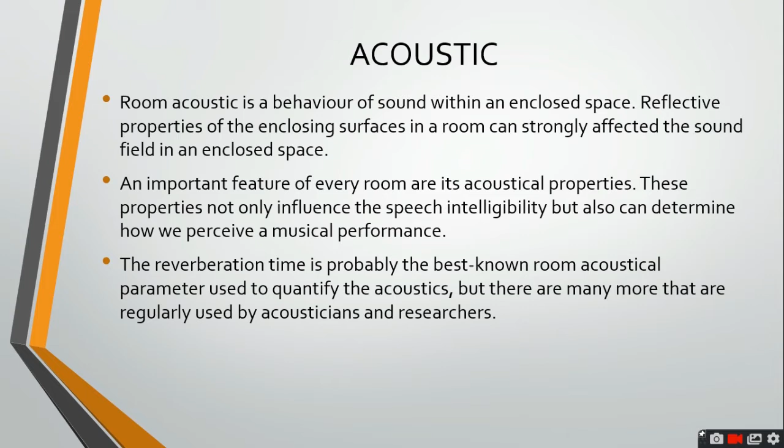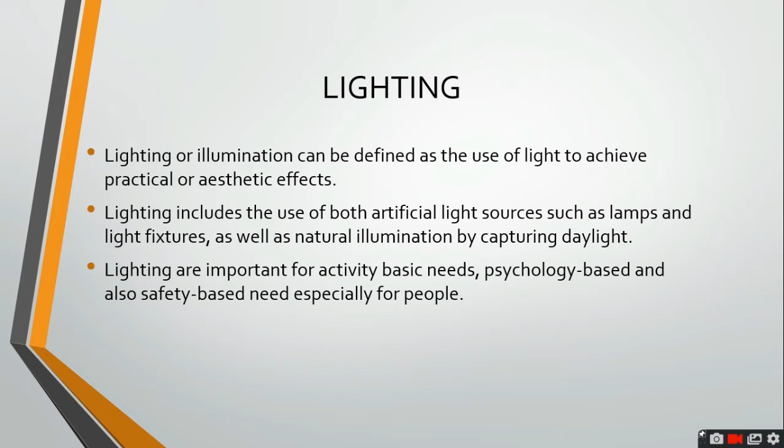Next is lighting. Lighting or illumination can be defined as the use of light to achieve a practical or aesthetic effect. Lighting includes the use of both artificial light sources such as lamps and light fixtures, as well as natural illumination by capturing daylight. Lighting is important for activity basic needs, psychology-based needs, and also safety-based needs, especially for people.

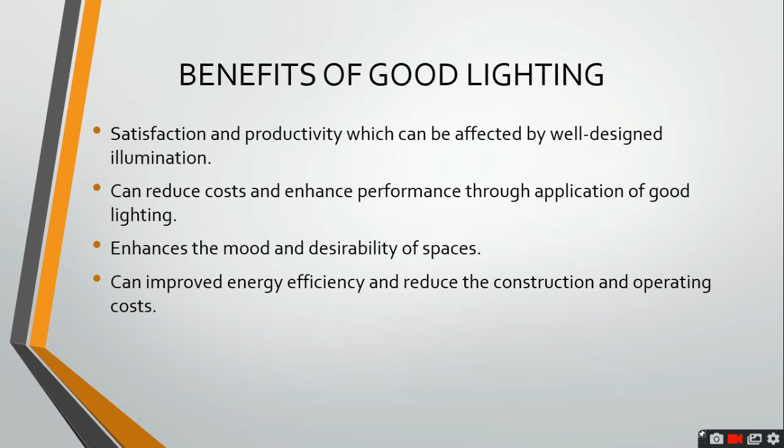So next is the benefits of good lighting. With good lighting, satisfaction and productivity can be affected by well-designed illumination. Next, it can reduce cost and enhance performance through application of good lighting. Good lighting can also enhance the mood and desirability of spaces. Lastly, good lighting can improve energy efficiency and reduce construction and operating costs.

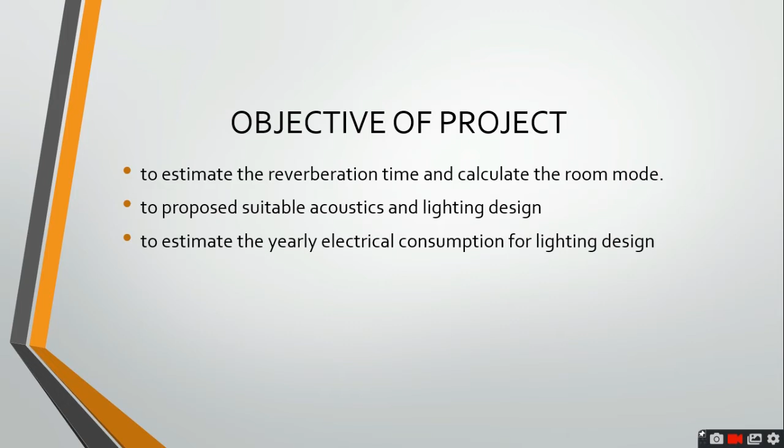So next is our project objectives. Our project is to estimate the reverberation time and calculate the room mode. Next is to propose suitable acoustic and lighting design. Lastly is to estimate the yearly electrical consumption for the lighting design.

Hi, I want to talk about the methodology. Firstly, for acoustic design, there are 6 characteristics: first, liveness; second, intimacy; third, fullness and clarity; fourth, warmth and brilliance; fifth, texture; and lastly, ensemble and blend.

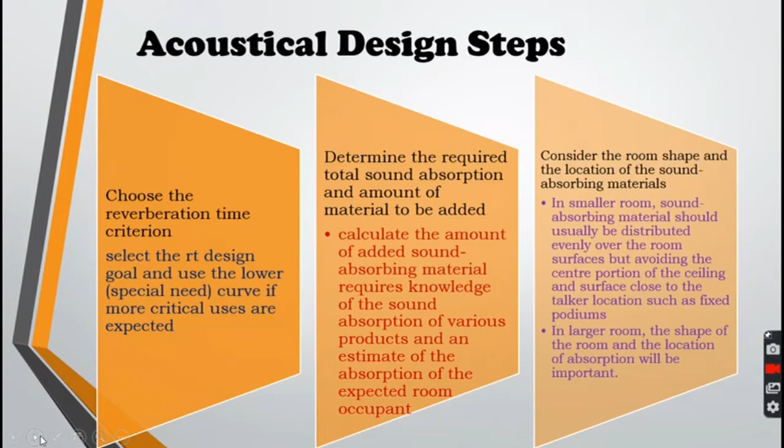For the acoustical design steps: firstly, we choose the reverberation time criterion. Then we determine the required total sound absorption and amount of material to be added. Third, we consider the room shape and the location of the sound absorbing materials. Then we assess the acoustical requirement. Fifth, we choose a maximum noise level goal. And lastly, we design to meet noise criteria.

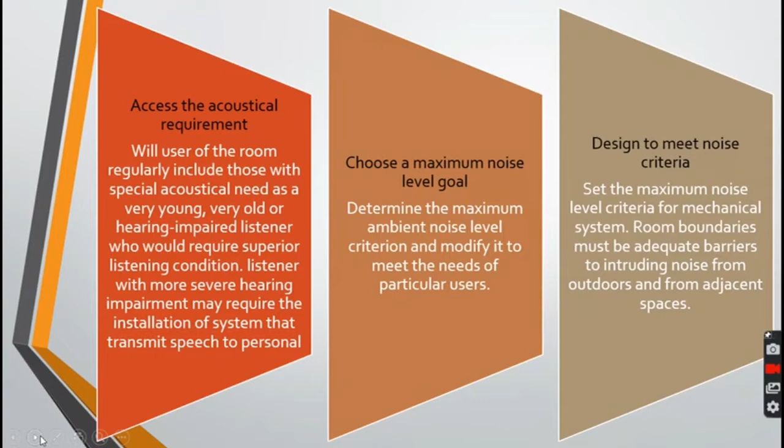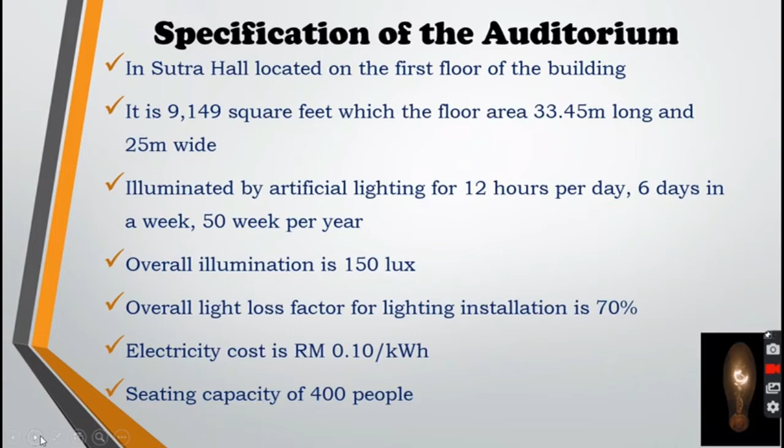It is illuminated by artificial lighting for 12 hours per day, 6 days a week, 50 weeks per year. Its overall illumination is 150 for the auditorium. Its overall light loss factor for lighting installation is 70%. Its electricity cost is 10 cents per kilowatt hour. The auditorium seating capacity is an occupancy of 400 people.

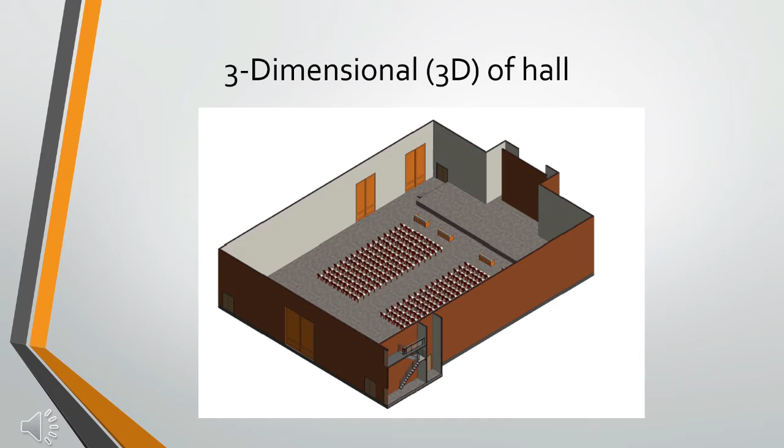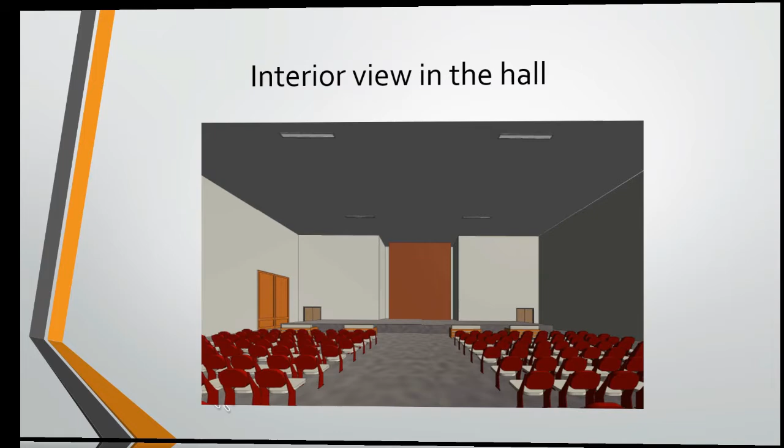This diagram shows the interior view in the hall with illustration of the chairs and stage. And lastly, this diagram shows the dimension of the stage and location of lamp in the hall.

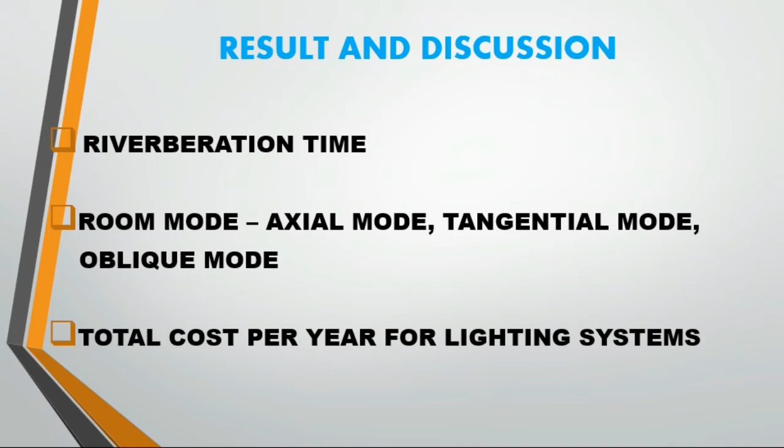For the reverberation time, we use Sabine equation, which is T equal to 0.161 volume divided by area, as you can see in equation 1. To calculate the area, we use area equal to summation of Si alpha i.

We got volume of 8362.50 meter cube. Total area we got is 115.38 meter square. So after calculating using the equation, we get the reverberation time, which is 11.67 seconds. This reverberation time is suitable for concert and auditorium hall because it can make the concert livelier.

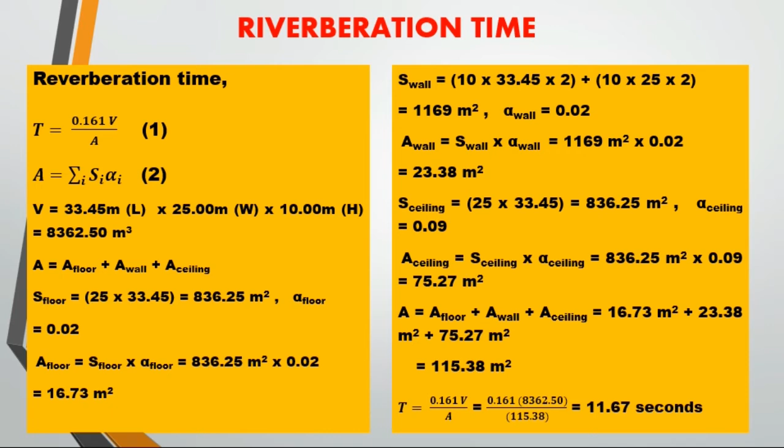Next is room mode. There are three types of room mode, which is axial mode, tangential mode, and oblique mode. Natural frequency of room mode can be calculated using the formula below. For this calculation, we use 340 meter per second for C0 value.

Based on all the tables, the least mode to get frequency of 250 Hz and above for axial is 0,0,15, for tangential is 0,14,14, and 14,14,13 for oblique mode.

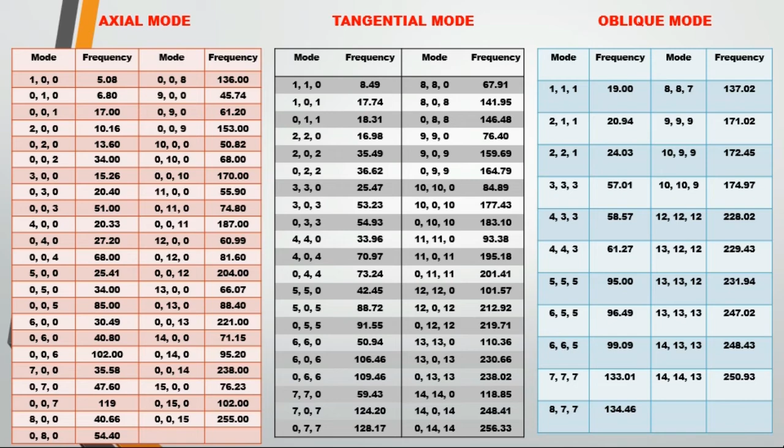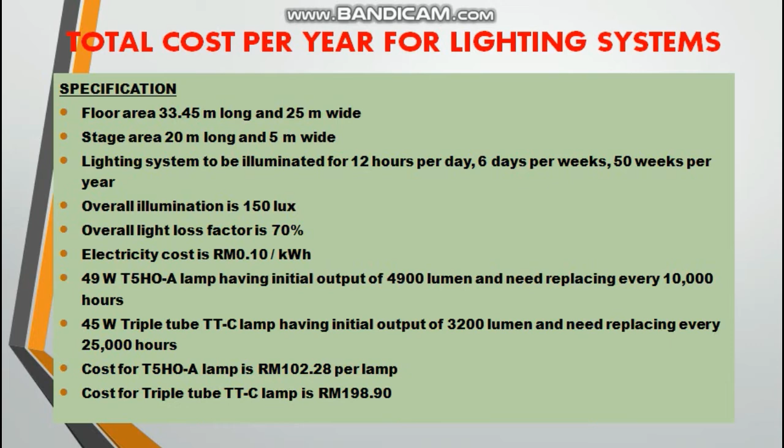This is all the specification used to calculate the total cost for lighting system as has been described in methodology. The total light hour used in this calculation is 3,600 hours per year.

The space floor area is calculated to be 836.25 meter square and the space stage area is 100 meter square. The illumination required is 150 lux and the overall light loss factor is 70%, which is 0.7.

For the first lamp, which is 49W T5HO-A lamp, the required installed lumen were calculated by multiplying lux required with the space area, then dividing it with total light loss factor. We get 179,196 lumens. Then to calculate the number of lamps required to be installed, we divide the installed lumen with the initial lumen for the lamp.

We get 37 units. Next, to calculate the installed power of the total lamp, the lamp required to be installed, which is 37 units, we multiply it with 49 watt and multiply again with 1 kilowatt per 1000 watt, then we get 1.81 kilowatt.

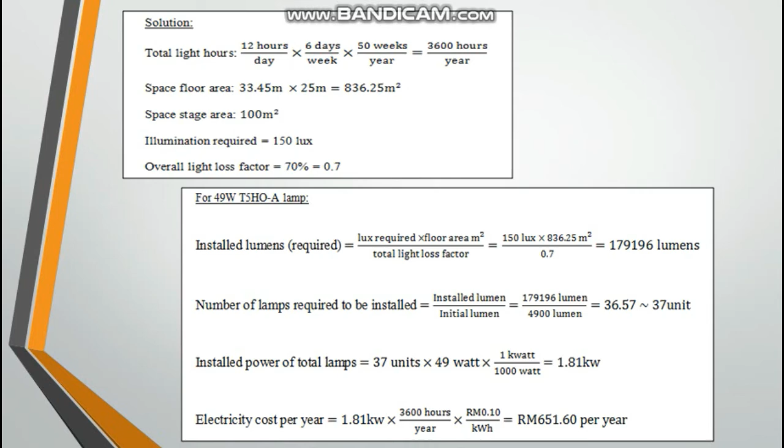The electricity cost per year were calculated by multiplying the installed power of total lamp with the total light hour and with the electricity cost. Then we get 651 ringgit and 60 cents per year.

This calculation was also applied for the second lamp, which is 45W triple tube TTC lamp.

Besides that, we have also calculated the initial lamp cost for both lamps. For the first lamp it is 3,784 ringgit and 30 cents. For the second lamp it is 1,392 ringgit and 30 cents.

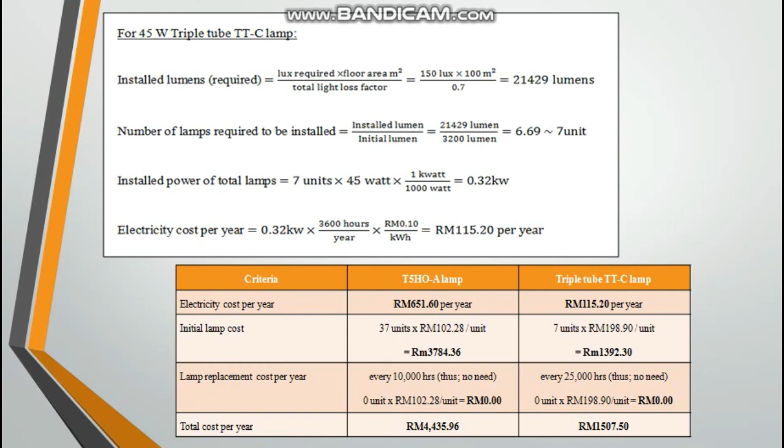For the overall calculation summary, the total cost for this lighting system per year for both lamps is 5,943 ringgit and 46 cents. Therefore, the cost for installing both lamps is affordable and not too pricey.

Next is conclusion. In conclusion, this group project has achieved its objective in proposing an acoustic and lighting design inside a sutra hall. The design was proposed based on the specification standard for auditorium and concert hall design. From the result calculation, the reverberation time of the hall is 11.67 seconds with dimension of 33.45 meter length, 25 meter wide and 10 meter height.

This project also is instructed to calculate the mode and frequency for the hall until it reaches 250 Hz. Based on the collected data, the least mode to get until the frequency of 250 Hz for axial, tangential and oblique room mode is 0015, 01414 and 141413 respectively.

Next, the area used to calculate for lighting system consists of two different areas, which is 836.25 meter square for floor area and 100 meter square for stage area.

There are two types of lamp that will be proposed for the hall, which is 49W T5HOA lamp and 45W triple tube TTC lamp. So, it is calculated that the lumen required to be installed in the hall for floor area space is 179,196 lumens, while for the stage area space is 21,429 lumens.

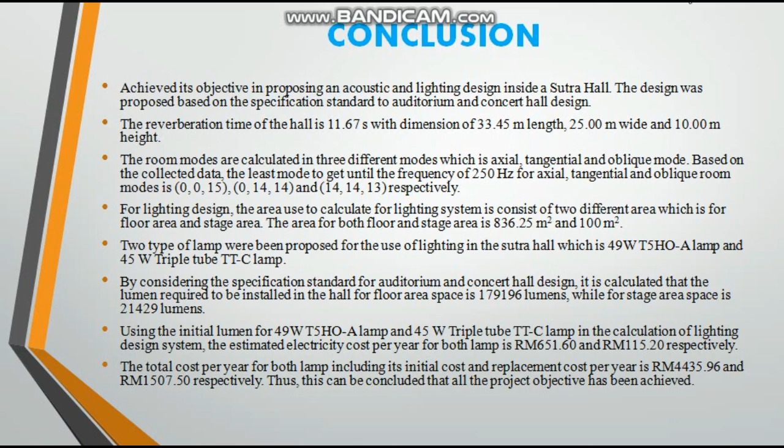Thus, this can be concluded that all the project objectives have been achieved.